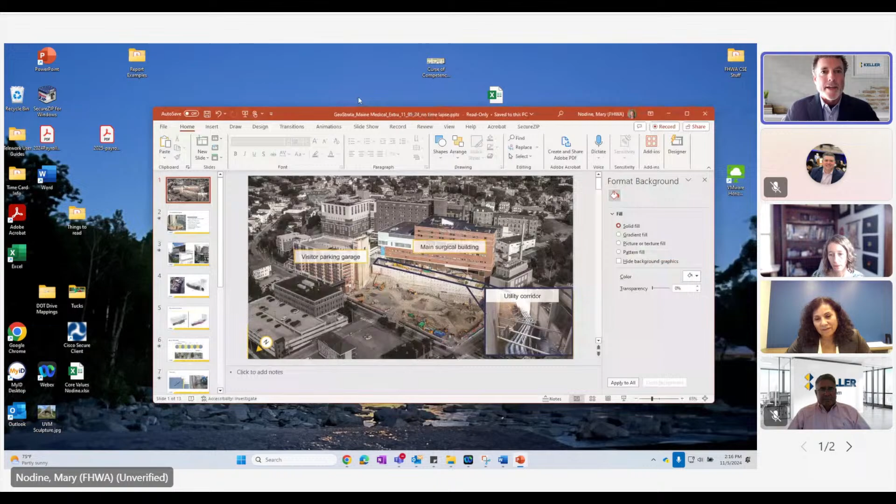Thank you, Mary and Brad, for the stage here and for giving us some time. This job started a number of years ago, back in 2018, so it's been a long time. A lot of this work happened during COVID, and we didn't get to see it. So really appreciate the stage at this point. And back to your comment that there's 4 of us on it, I can't overstate the amount of effort it was to build this wall with a collaborative team approach.

So as shown on this photo here, I think the picture is worth 1,000 words. The need that came from this development with Maine, which was ongoing renovations over many years, was to cut into that slope. And there was an existing garage that had to be demolished and that wanted to stay in service as long as possible, which is why we were called in early. So the need arose from the challenge of operationally trying to keep this hospital operation parking as long as possible, while at the same time cutting into a slope that revealed 70 foot of earth that had to be retained with that building right behind you.

So I'll leave it at that and maybe ask the other team members with Giuliana and Drew. But at the beginning, my involvement was really just listening, napkin sketching, and trying to figure out how we're going to solve this problem, putting the right team together. So maybe, Drew, you want to jump in, you and Giuliana and Zach kind of jumped in with that.

Sure. My involvement was probably somewhere around 2017. And we had looked at the project from a bid standpoint with another contractor. I came from a different company that ultimately was acquired by Keller. And lo and behold, I was able to work on the project. And we had a lot of upfront design meetings with Simpson, Gumpertz, and Heger at their office. And it seemed like every other week we were having another meeting.

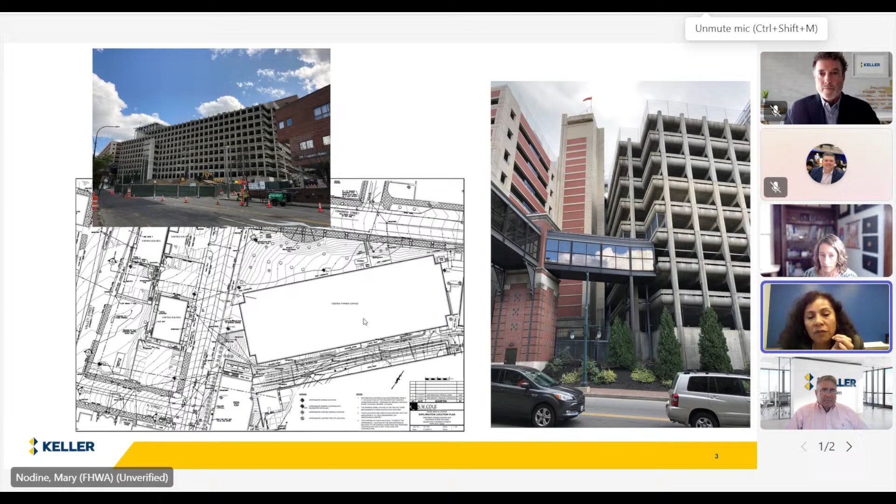So the new building is going to be the new phase of Maine Medical. They wanted a very prominent location, which was going to replace that existing employee garage. As Drew mentioned, with the limitations in space, the back wall of the new building was really within 1 foot of what would be the line of the final SOE. So there was not much room there to work with for tolerances. And if you go back to the original photo with the view of the wall, that wall was maximum 40 feet tall, the existing south wall of the garage. The main building of the hospital was within 40 feet behind that wall.

So demoing that existing wall was not really feasible if we wanted to maintain the stability for the hospital, plus all the utilities. And it's not just any utility corridor, it's really the trunk, the livelihood of the operation of the hospital going through that utility corridor right there. So not much could be done there. So not demoing the south wall and using it for support was about the only way that could be done. Having said that, we were going 80 feet deep, so the loads that wall was going to sustain were much higher than what it had been designed for.

Right. Not only that, but that wall was in service since the 60s. It was a parking garage, so there was some deterioration, not just to the concrete, but even corroded rebar. So the capacity of that wall was limited. We did an extensive investigation to determine what the existing conditions of the wall were, and what tieback loads the wall was adequate for. We concluded from that this could only be a temporary facing. It would only be able to sustain loads up to the excavation to the top of the footing.

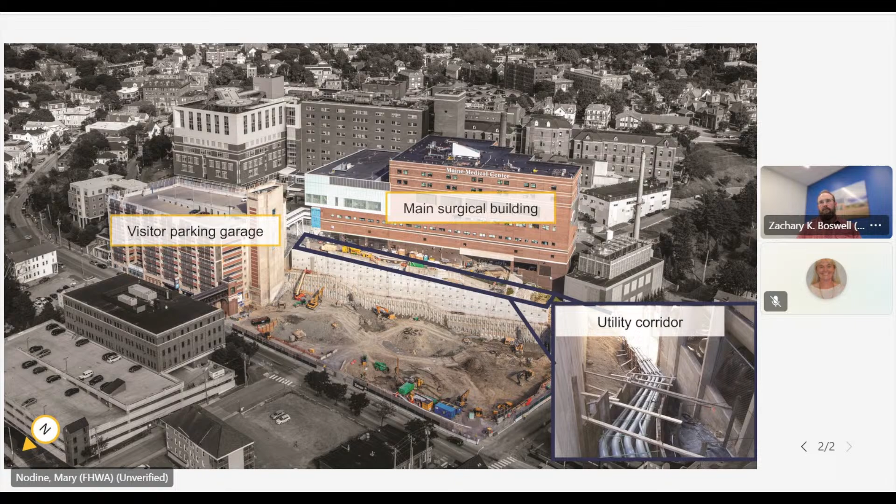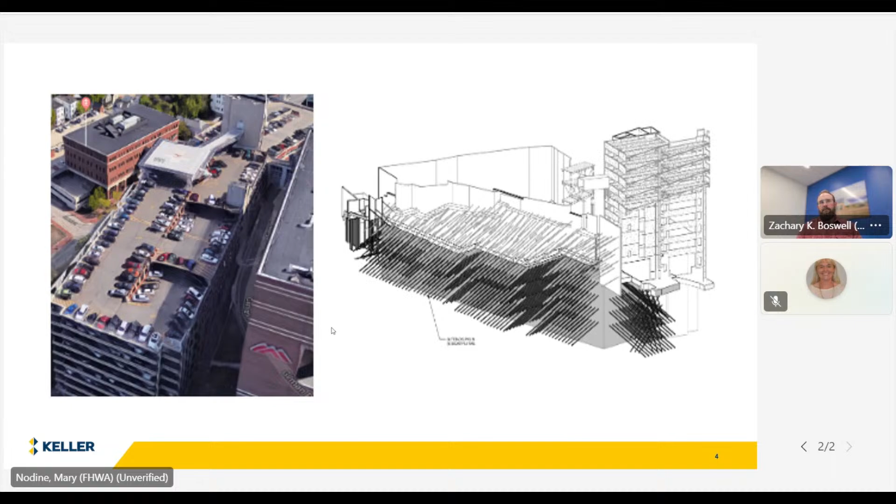The next thing after that was how do we connect both those walls to the second wall that we ended up installing at the bottom. That was, again, another complexity to work through. That retaining wall had a footing, a wide footing that extended about 7-8 feet in front of the wall. In order to make room for the secants, we had to saw cut that existing footing. That in itself entailed some potential instability that we had to deal with.

Then install the secants and then figure out how do we connect the top of the secants to a new pile cap, to the wall. It ended up being that basically the front of the secant wall ends up about 3 feet in front of the permanent facing wall. So you do have some moments to take on. For that, we had to double the rebar and just make it all work.

So cutting the footing itself while maintaining its stability, that was done by the general contractor. That was also pretty intense as far as trying to figure out what kind of saw cut to use, how it would be done within the constraints of the site. So a lot of things to think about, even just from how to build the wall itself in its place.

Talking about the tiebacks, I may be going ahead in some of the questions you have, but for the tiebacks, it basically comes down to we have a critical structure behind us. We have to do all we can with our due diligence to identify where these utilities are, what kind of foundation. The hospital is on both shallow foundations and pile foundations. The west end is on shallow foundations, the eastern 2/3 is on piles.

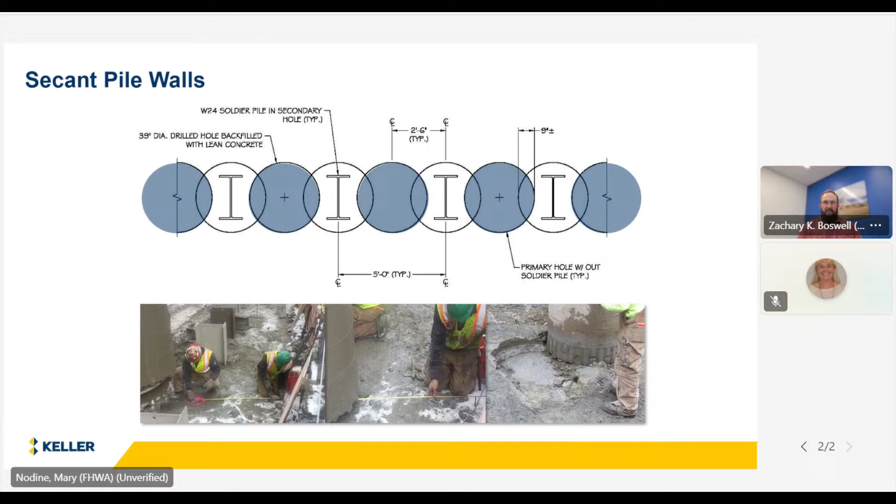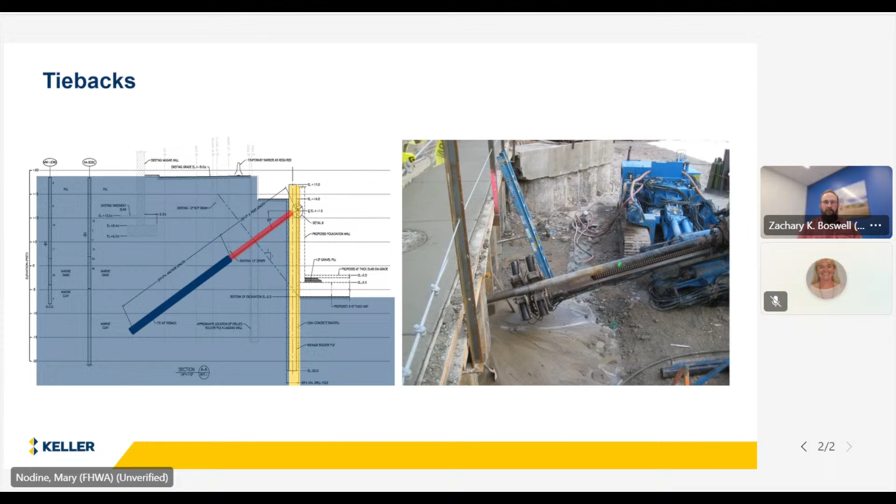So we basically model it all in BIM, in Revit, actually, in 3D, and we model everything so that we could locate the tiebacks, and I call it play with the tiebacks and the angles of the tiebacks. I've never played with angles of tiebacks like I've done for this project before. One thing is to play with the vertical angles, but we played with the vertical and horizontal angles, trying to make sure that we were threading through piles, making sure we clear utilities. There were a few tiebacks that were definitely threading the needle.

I'm amazed that this project went so smoothly without really hitting anything. At least on paper, we had the typical shot where you have a batter pile and a vertical pile, and you had about a foot of space, and you had one tieback going right smack in the middle there. Zach and Andrew can talk more about what we did in the field to do the quality control on that, but I think the one thing that I'm most proud of for this project, for everybody in the team, the design team, is the due diligence and the planning.

We really went out of our way to make sure that every single document of installation, of temporary sheeting that was in that corridor, of utilities, of piles, anything that you can think of that could be an obstruction or could derail this project, we wanted to have it in the Revit model and make sure that we plan ahead.

That was one of the things we did, and then of course we did a very diligent evaluation and assessment of what the potential movements of that SOE could be, what would be the impacts on the hospital. And we developed a really detailed tracking of the surveying data and the movement monitoring program once that went into construction. So that was a long spiel. I'll leave it up to Drew to talk about the tiebacks a little bit more with the operating parking garage.

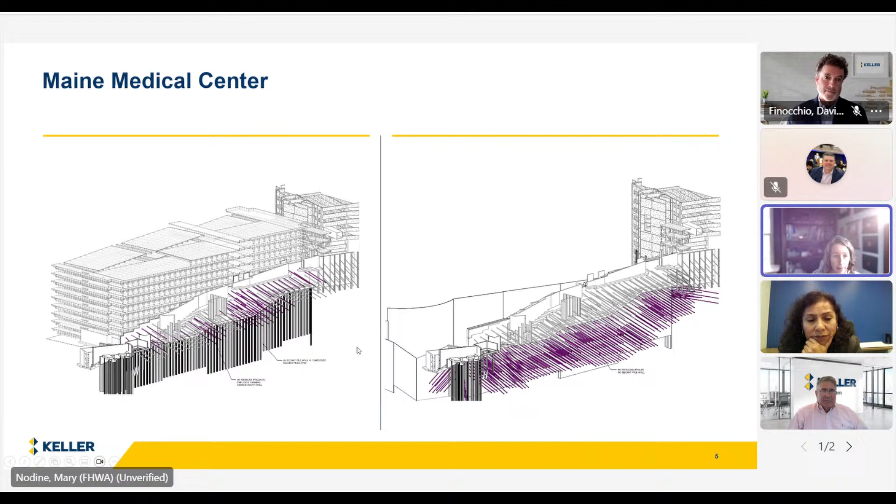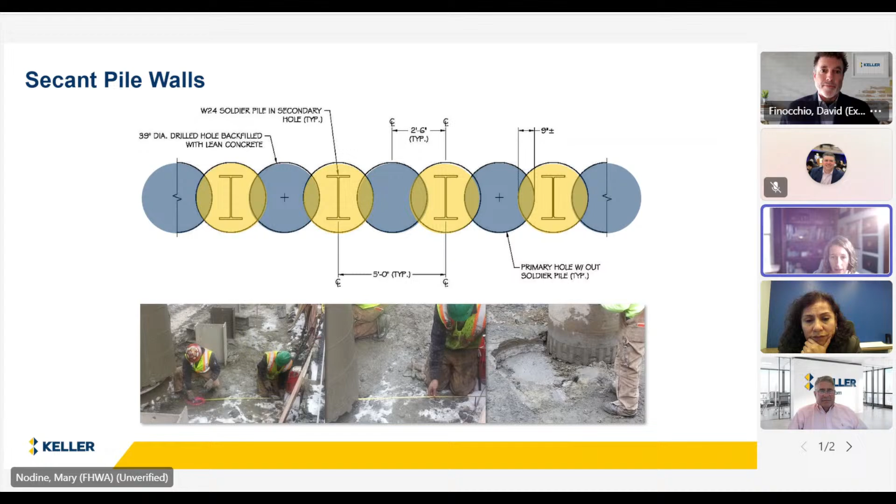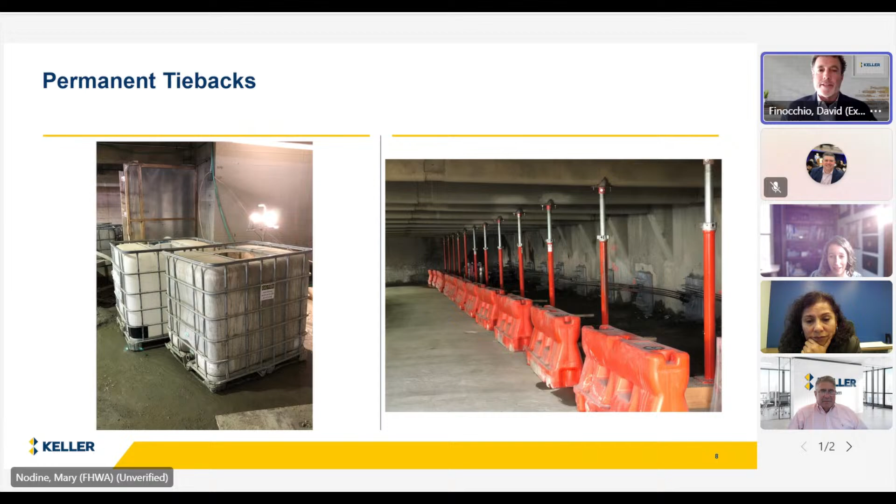Okay, thank you. I want to dive in now to the construction challenges related to the tiebacks, because we have some interesting pictures there. I don't know if David or Drew wants to jump in and talk about that. Let me find the photos. So here's some tieback drilling. Yeah, these are just illustrations. The first two, I'm sure most folks on the call know secants and tiebacks. So Drew, I'll turn it over to you. Just show you some of the real life working conditions. That's good right there, Mary.

All right. Yeah, so I remember talking to the operations manager. He says, "You want to do what? In how much headroom?" So you can see we had the existing slab above us, the slab below us, and we had to shoehorn the drill rig into that. If you look closely at the photograph, the drill is actually on a little bridge. So we had to bridge from one beam to another, and work in this headroom.

And so everything, like the tieback anchor tendons, came coiled in a horizontal uncoiler. So you're trying to work with a, well, at that point it'd be 200 feet long with the pigtail, in this headroom, and pay it out into the casing, and then grout it, and then pull the casing out. But there are a bunch of things that happened before we even got to drill.

Giuliana didn't mention that the wall for the building was not plumb. And so every anchor had a vertical consideration. So all these holes had to be cored at different angles to get the correct azimuth and the correct location.

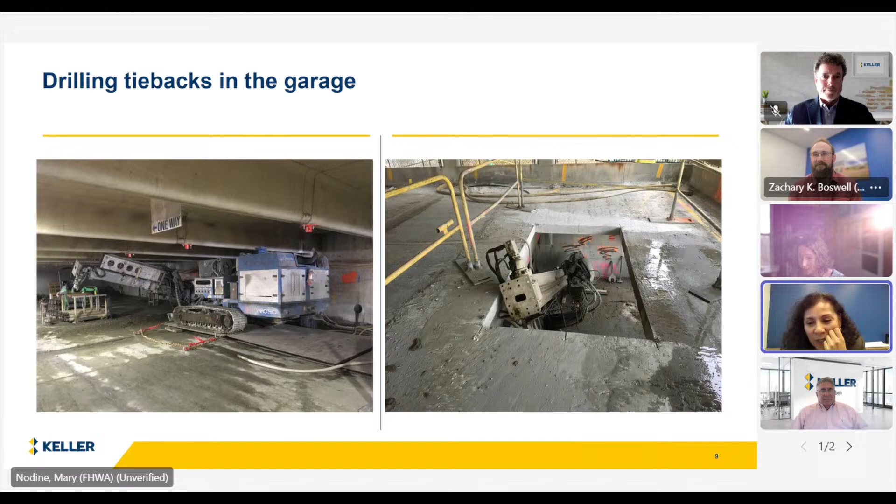At some of these critical ones, we were on the phone continuously, making sure we were getting these in the right spot, and it was highly successful. And I think we have to give kudos to the drillers from Keller, because in the planning and design, when we were rating the risk of hitting something, we did +/- 1 degree cones and +/- 2 degree cones, the +/- 2 being what we typically would use in any specification. But looking at the gyroscope data, if there was some slight deviation, it was like 1 inch at most. So it was almost perfectly following the path.

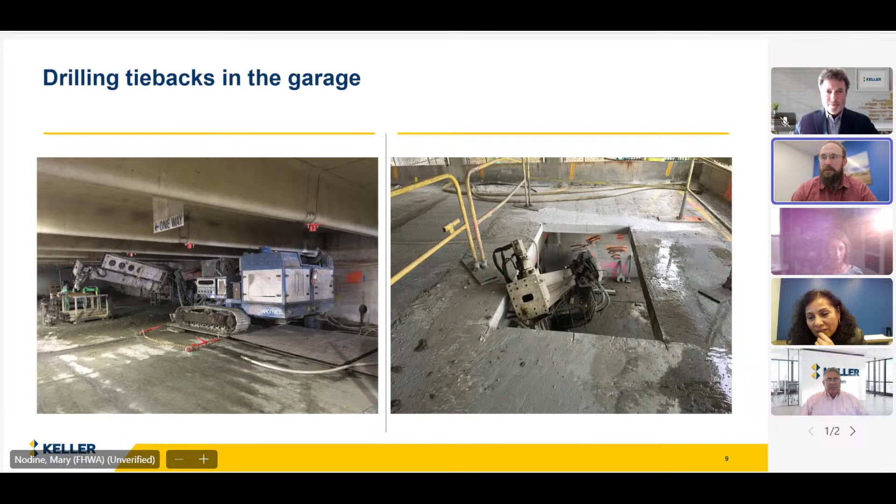Yeah, and you never had any incidents of hitting anything on the whole project, or were there any issues? No, we didn't hit any foundations. We moved a couple of tieback heads based on seeing some existing conditions, but we were fortunate that we didn't have any major issues like that. We had one surprise.

Yeah, we had one surprise, but the tieback work went smoothly. What was it, when we did the core, right? We did the corings through the wall for installing the tiebacks at the start. And in some of those cores, we found a utility that, to our understanding, was not supposed to be there. So that forced us, in that area, to go ahead and relay out the tiebacks to avoid that utility.

One of the things that worked in our favor in that area was that because of the permanency of this service life for this support of excavation, and with the hospital being a critical structure behind us, we had some redundancy built into the tieback load. So we did have some flexibility to move around tiebacks without necessarily changing too much on what the tiebacks needed to be. It obviously ate a little bit into that redundancy, it reduced it, but it was there and it actually played in our favor.

Yeah, wow. So that original issue, that was when you were just coring through the wall, so it was something really close to the wall that you found, the electric line? Right.

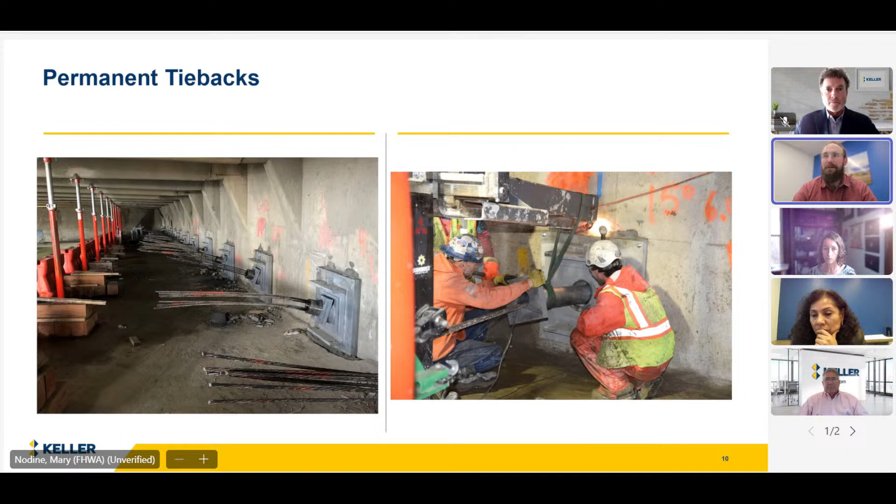We did a lot of modeling. We made a model to help us predict the movements, and then using that information, we set up a very extensive movement monitoring program, and Giuliana touched on it, from the very beginning, before even putting the first tieback in place, all the way through until the building was not substantially complete, but the foundations were in and they were starting to build up and backfill around certain areas.

And based on that, really the majority of the movement occurred during the initial tieback installation. We worked with Keller to change a few installation procedures, and we saw that the movement really was abated. But we didn't have as stringent movement monitoring criteria, the typical threshold and limit value. We based it on all our predictive modeling and seeing what we got in the field, doing more of an observational method.

Where we had tighter tolerances really was the installation, keeping the secant piles as plumb as possible, because a lot of the wall wasn't plumb, and there wasn't a lot of space between the new building and the secant wall. So we couldn't really eat into anything on both sides of it. So it was, I'd say, more stringent installation tolerances than movement monitoring.

Yeah, I think one of the things that plays into that, Mary, is that sometimes when we're doing traditional SOE, we don't know much about the existing buildings, and so you tend to be conservative, putting a threshold value, limit value within bounds of 1 inch and so forth. With this project, it's an 80-foot deep excavation. A lot of it is on till, and during construction we found out the till was better than anticipated. So that also helped to control the movements on the wall.

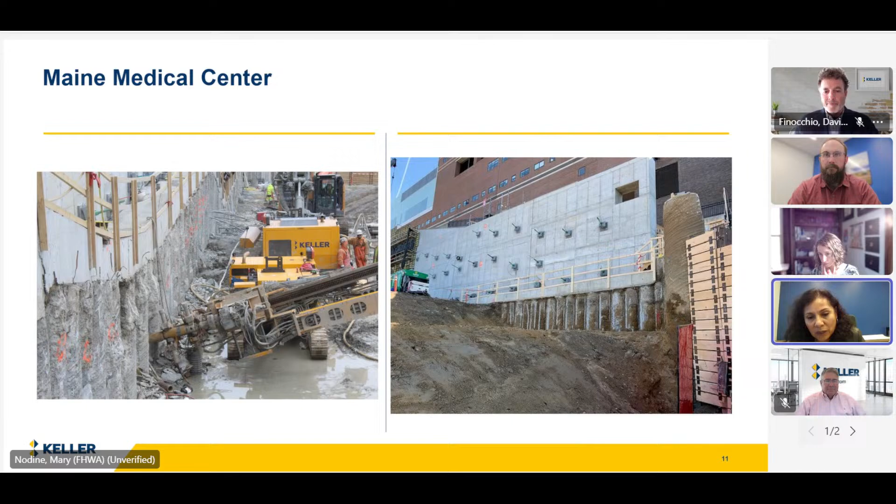So we knew there definitely was going to be something to look out for there. Luckily, though, the western side is the shallower side of the site; the deeper one ends up being around the middle. But again, the planning and the due diligence paid off significantly in this case, because we could have gone an easy way of trying to limit the movements to something tight. But I think, even with the already tight situations here, that would have limited what the contractor was able to do more so than help. Yeah.

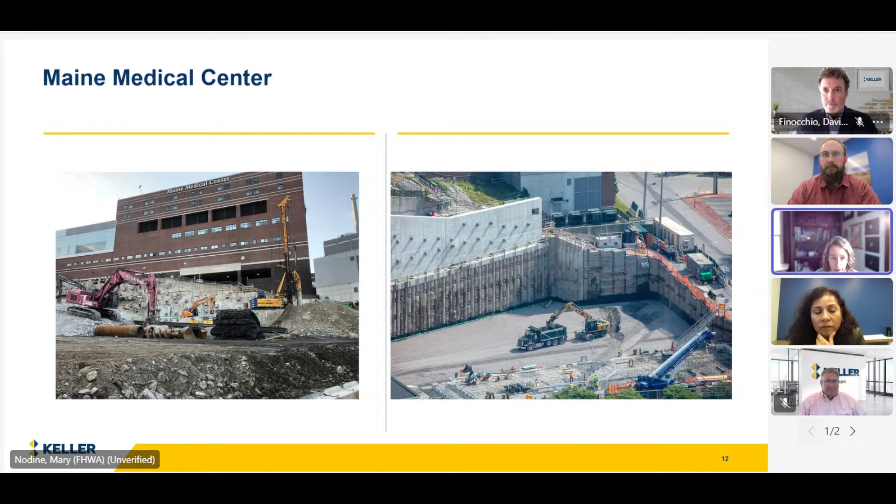I'm just kind of scrolling through pictures, so anyone who wants to comment on anything, go ahead. But we're getting relatively close to the hour, so I want to make sure to get to my last question, which is, I would love if each of you could say your most important takeaway from this project and what you learned from it that you'll apply to other projects, and we can look at this beautiful picture of the final Malone family tower here.

Sure, I can start. I appreciate the team and everybody here. I can't articulate enough the complementary nature of the whole team at all points of this. It really was one of the coolest projects I've been involved with in my career. Really good team, and the communication, the coordination all around. And thank you, Zach, for that note about the Keller team. We're very lucky, as a former consultant myself. I can't say enough about the team that we had in place to execute this. There's probably over 50 folks from Keller that touched this project in the field. So I'll turn it over to Drew, but really just a wonderful project. Thank you.

Thanks, David. The collaborative nature of the job, certainly, probably a number one comment. But there were a lot of technical challenges. For me, the gratifying part was, I remember going back and forth with SGH on how much room we should allot ourselves with the tiebacks at the distal end. And we went back and forth for what seemed like months. And then they said, well, how are we going to measure this? Gyroscope. And then they wanted to do every hole. And I was like, oh, here we go.

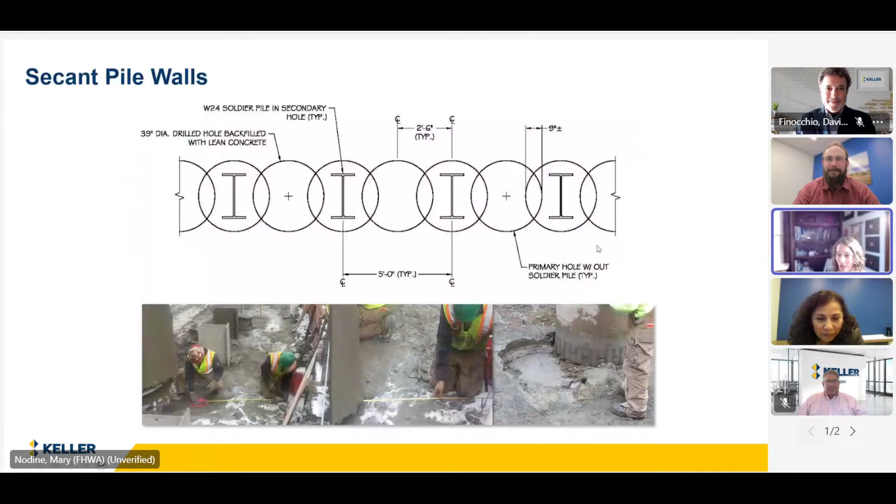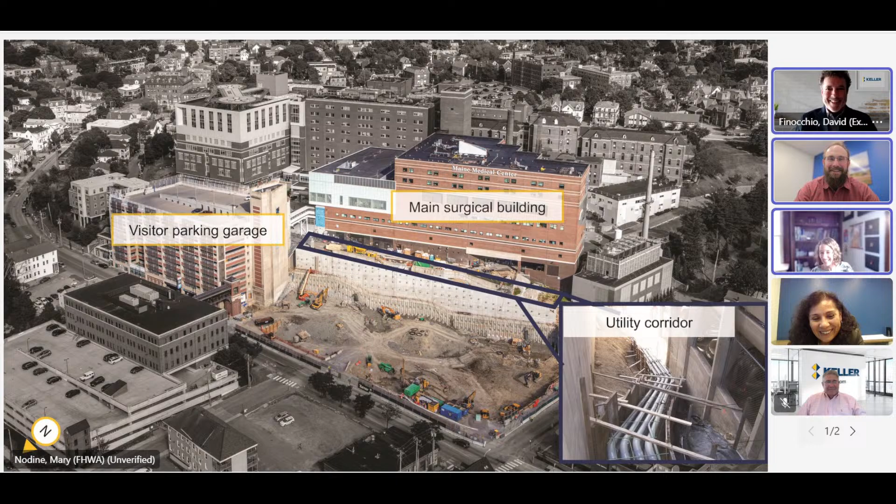So I'm curious, I don't know how much time you guys spent on site, but I know some of you were there a lot. So do you have any favorite Portland experiences or restaurants or memories of being in that area? Many. Many. Salvage Barbecue was across the street. I was just going to comment on that. Right, you can see it in the last one. That was the go-to place every time we were there. Yeah. There's a lot of great restaurants and breweries and everything in downtown Portland. I go up a couple times a year just to go up. Yeah, I found Thompson's Point and hadn't been up there, but got to see a concert with my wife now that we're empty nesters. So it's good to get out. Yeah. A lot of good food trucks.